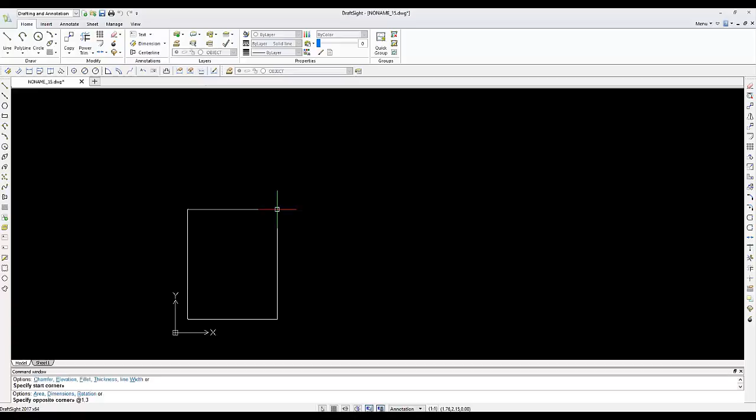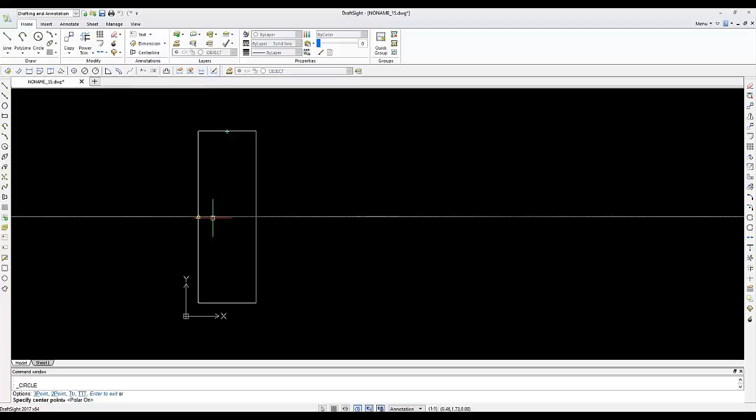Another technique which is handy: I want to place a circle right smack in the center of this rectangle. Now I can do that without actually creating construction geometry. This is called the tracking tool that DraftSight has available. What it does is actually infer the midpoint of these two lines and place the exact location of where that circle should be, which is for precise location.

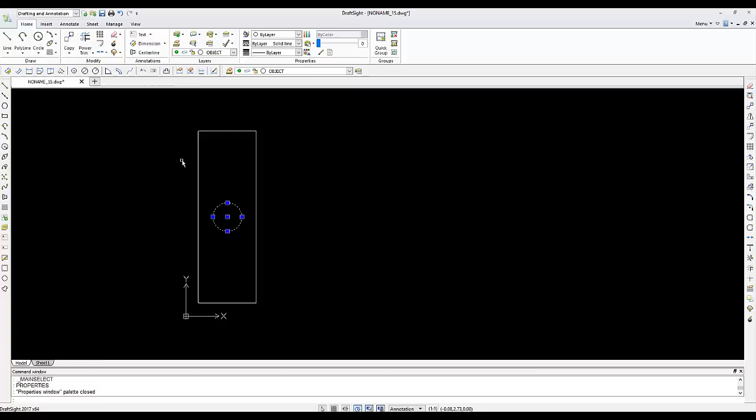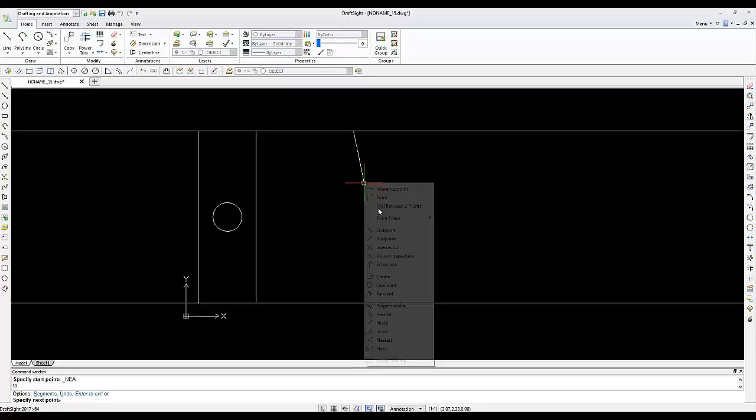I'm going to change this diameter to, let's see, diameter ½ inch. Now let's begin drafting the second view here. Let's start with an infinite line. I'm going to place a line here to start the view somewhere nearest my cursor and perpendicular to the bottom.

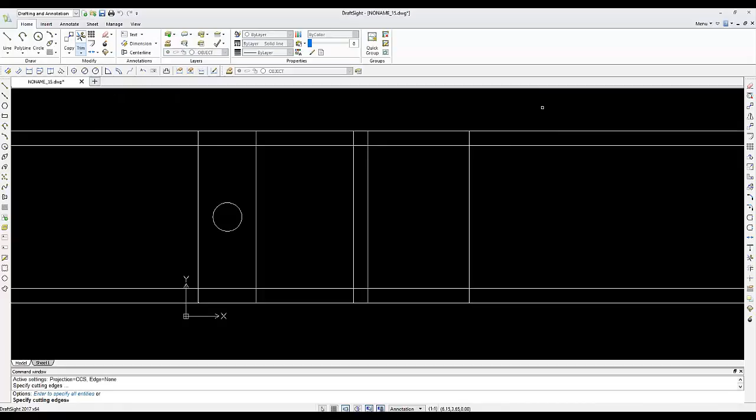I'm going to do an offset of 2 inches here to this side, and let's mimic the thickness of this bracket at 1/4 inch, say. Here I can use a trim to quickly get rid of the excess lines. With a fence, I can quickly get rid of all the lines I don't need.

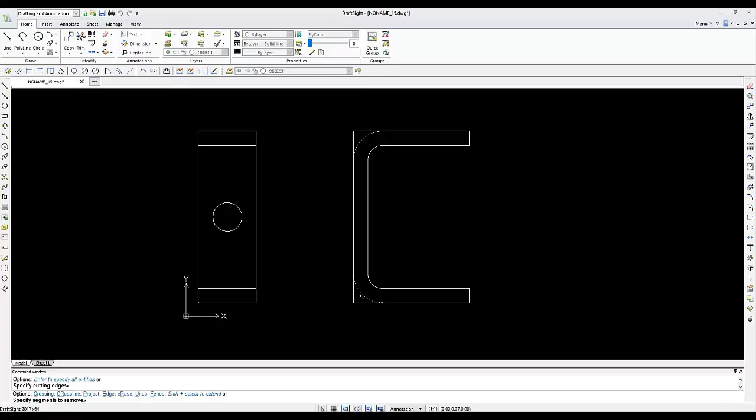I can go to fillet to add a 1/4 inch fillet, mimicking a bend in my bracket here. Let's specify that radius as .25, which will represent a 1/4 inch. Place it here as well as here. Let's do another offset for that thickness. And finally, let's trim away this sharp corner here so that it can look like a bracket.

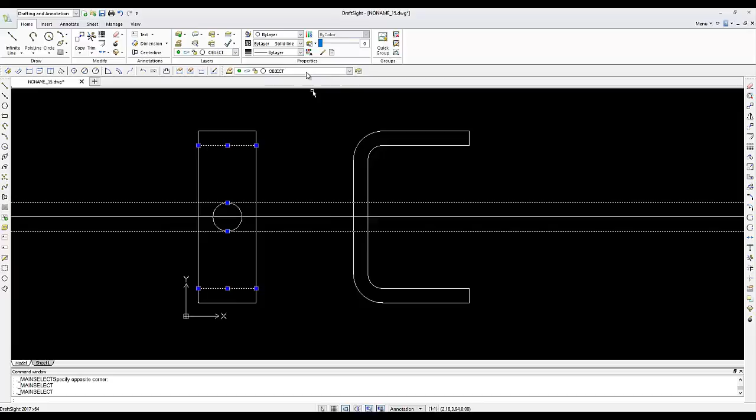I also want to add the lines here for this hole. So let's do another infinite line, do a quadrant here, quadrant here, and let's do a center mark. These will be hidden lines. I'll change this one to center lines here.

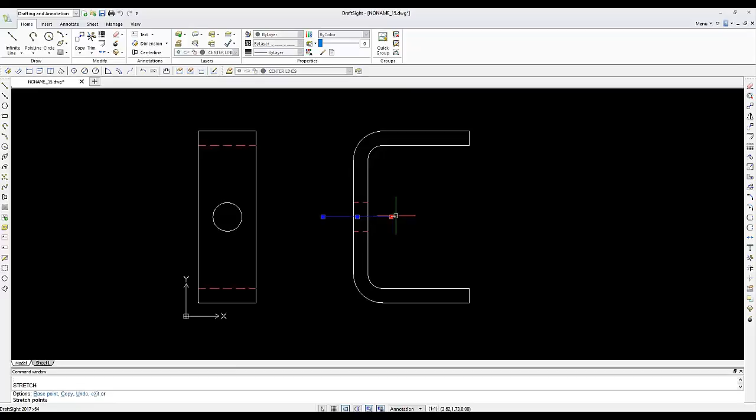I'll have to trim away all these here. And let's drag this one out just a little bit so that it can look like something close to a center line. Let's add a center line here. Change that to the center line layer.

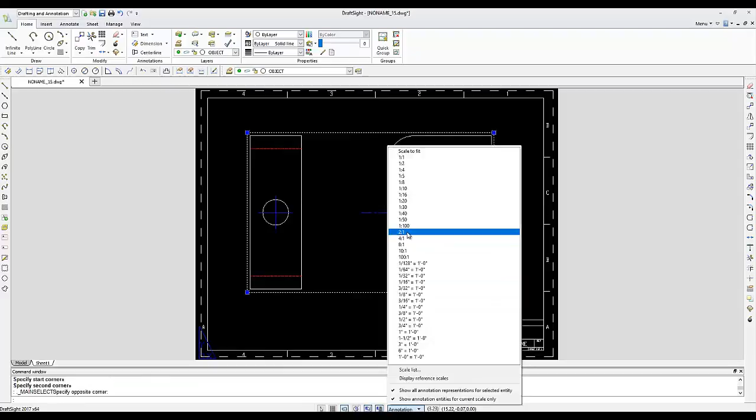And now we can go into paper space and add a viewport here. Now I can change this viewport to be, say, 2:1, and it adjusts to its size, and now we're ready to start dimensioning.